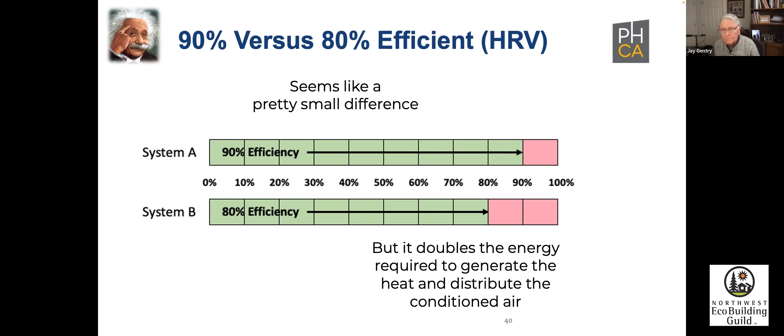So when you're thinking in terms of efficiency, look at the backside, if you will. Next thing: efficiency is the first renewable. I'm not going to read all of this, you'll have it so you can read it at your leisure.

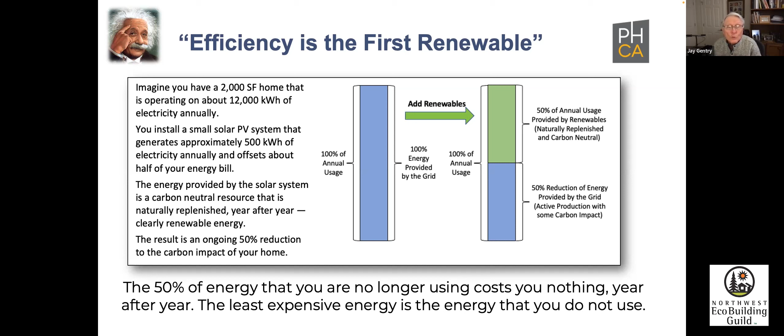Basically, if you take your annual usage of energy on the left-hand side, and you add renewables to reduce it by half, that 50% energy that you're no longer using costs you nothing year after year. The least expensive energy is the energy that you don't use. You can put renewables to do it, but you can also do it by employing efficiency measures, doing air sealing, adding insulation, using LEDs, all of those things, and you reduce that.

Another thing that I've found helpful is to put the investment in context. You're selling wood fiber insulation and it's more expensive than foam, and people say, God, it's 20% more expensive, that's really expensive. So I'd suggest you break down the investment categories in the build and retrofit. I haven't defined the categories here, but the insulation isn't a big portion of the overall cost of the home.

You can explain that the product category, whatever you choose, is only 5% of the project cost. So even though it's 20% more to get the wood fiber, it really only represents a 1% increase in the cost of the overall home. For that 1%, are you willing to give up efficiency, health, comfort, or resilience for such a tiny investment? That's another way to do something.

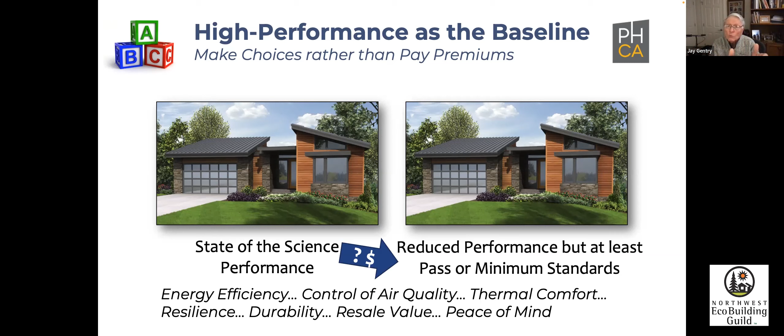You want to give up efficiency, air quality, comfort, resilience, durability, value, peace of mind. People love to win, but they hate to lose. So giving something up, positioning it as 'this is what we offer, we can save you some money, but you're going to give something up for it' is much more powerful than saying 'this is what code requires us to build, but we could do something better like this.'

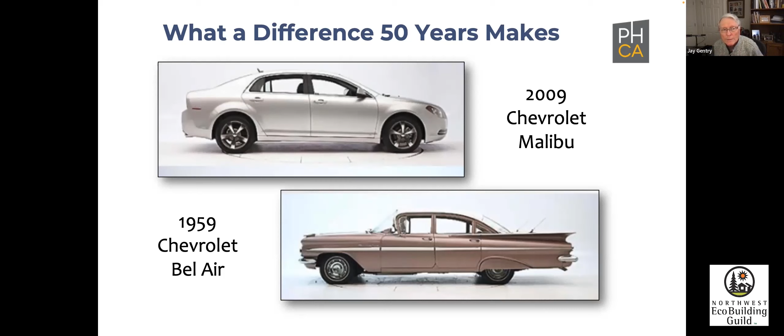The next one is: what a difference 50 years makes. You can find this video on YouTube. It's a 2009 Chevy Malibu in a head-on collision with a 1959 Chevrolet Bel Air. They used test dummies, of course, and the car built in '59 has a longer wheelbase and is significantly heavier. The 2009 car has airbags and safety belts and things like that. If you look at it, the driver in the 2009 car walks or maybe limps away, where in the other one, you need buckets to get the driver away.

The same thing goes for a Toyota, if you will. If the baseline model only complied with '59 safety regulations, you'd have to spend extra to get safety belts, airbags, anti-lock brakes, energy absorbing frame, air sealing. Would you invest to get them? Probably so, but you don't have to think that way because they're required to have them. The safety regulations put those there. This is the baseline, and if you want to add extra things for convenience, like an XM radio or video cameras, you can add those, but that's the baseline.

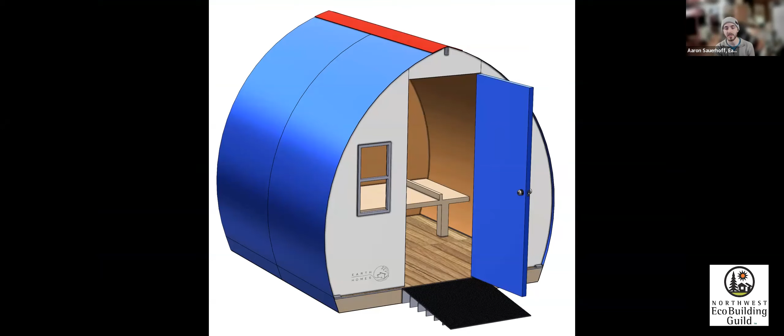So just as a little plug, this is our initial mock-up of where we're going in the next generation of micro shelters. We're talking hyper low-carbon sequestering materials, high performance, high efficiency, et cetera, very low cost. But more on that later.

So here are some really important goals. Actually, sorry, that's the next slide. This is a brief overview of what I'm going to be talking about.

Natural ICFs—ICF stands for insulated concrete forms—it's a way to... ICFs are great, there are ways to reduce the amount of EPS foam. If a client wants to use ICF, great. There are natural ways to do it that use 17% of the concrete as standard monolithic concrete walls, and that's what we used for the Briar build that you're about to see in a minute.

SIPs, fantastic - there are natural ways to do it. There's a company up in Canada we work with when we order SIPs. We call it SNIPs, structural natural insulated panels. These use recycled shredded glass - there are huge mountains of glass bottles unable to be recycled, so companies shred it up and use it for insulation. They use a structural wood fiber board as the shear and insulation wrap, airtight, pre-assembled, very large wall system panels. You'll see some pictures of that soon.

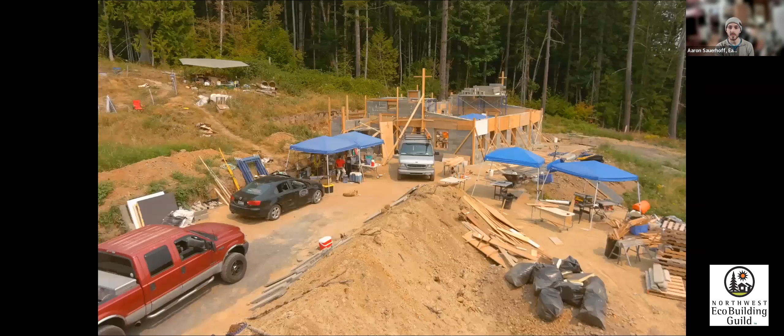Here's a short little raw drone footage of the early part of this process. This is the intro shot of this late summer briar build, as we call it. So it's an ICF house that we built into a hillside.

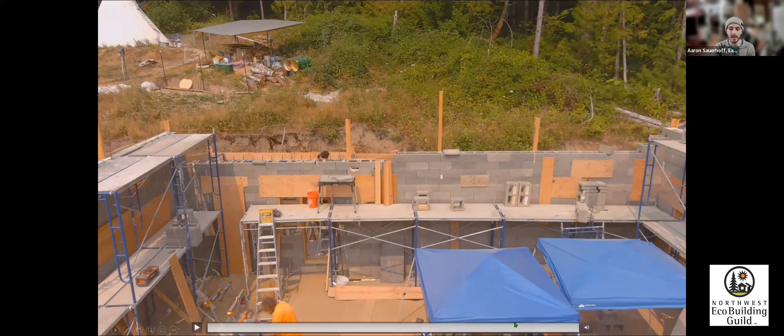So the whole back of that house is a retaining wall that got buried. What you see in the background there is them building a root cellar that got buried into the hill. This is kind of the cross section of the blocks you can see right there, with a little bit of form work at some spots where that could blow out.

So yeah, the system, the methodology is very similar to any ICF block, but it's far more healthy and natural and plasterable, which is really nice and easy to work with.

What I really appreciate about blocks and wall systems like this are how easy it is to crane on either SIPs or SNIPs. The attachments are easy, simple. It's a fully insulated, relatively low carbon wall, roof system that is quiet.

And incredibly airtight. Where it connects, we just did a whole thermal infrared scan of the building today and confirmed that where all the walls and roofs go together, there's no thermal bridging. We couldn't see the seams of the walls and the roofs in the infrared scan. So I'm really, really excited to say that it worked. We created a really high airtight building envelope with almost no thermal bridging.

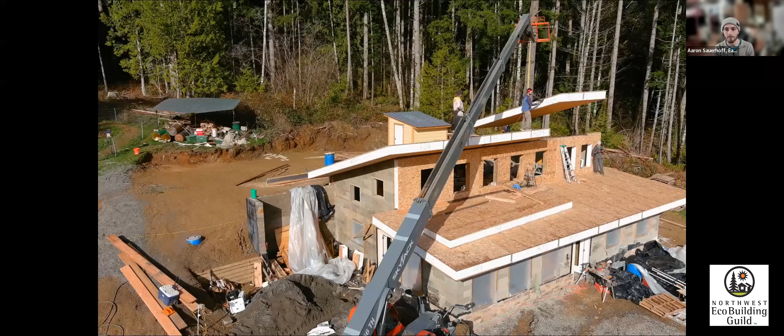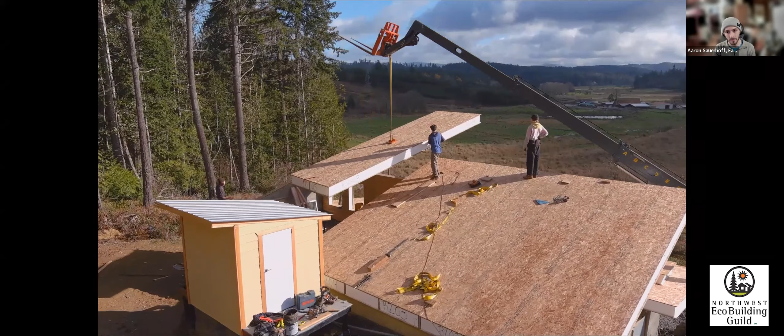Again, this is another quick little drone shot of how SIPs can easily be installed on blocks or other walls. I'm a huge fan of affordability, and when we can reduce the installation time and make the installation process more accessible, that is an important component to this model. So, again, beautiful view. Love this site.

Plasters. I want to talk for a moment about clay plaster and the importance of it. I won't go too deep into the details, but there's a relationship between clay and water that as clay is exchanging water actively with the air, it's releasing it about 50 times smaller of a water molecule. And that ionizes that water molecule pretty substantially. That electrostatically attracts itself to anything floating in the air, dust, bacteria, viruses, anything floating becomes then heavier and falls out of the air.

So every time we walk onto this job site and walk into this house, one of the first things that people notice and comment on is, well, after they comment how beautiful it is, they say the air is really clean. Feels really clean in here. It's true. Clay cleans the air.

Selling point. I'm proud to say that this house has no paint. It is a paint-free house, and it's beautiful.

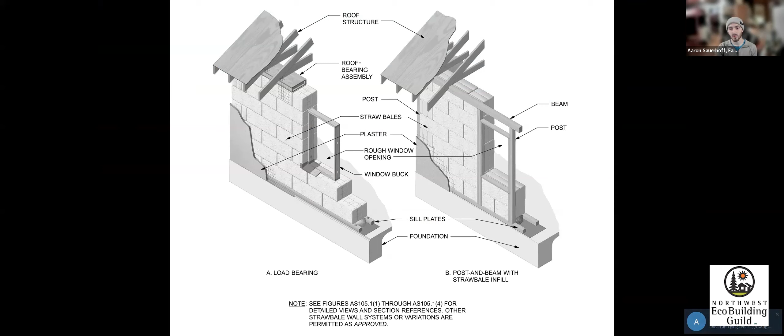I'm really excited about the work that CASBA, the California Straw Building Association, and many other organizations have been doing over the decades to bring building systems like straw bale, and soon cob, into the International Building Code. We now have Appendix S in the Building Code.

This is straight out of the code book. Bales can either be load bearing on the left or non-load bearing on the right, with either post and beam or a Larsen truss system.

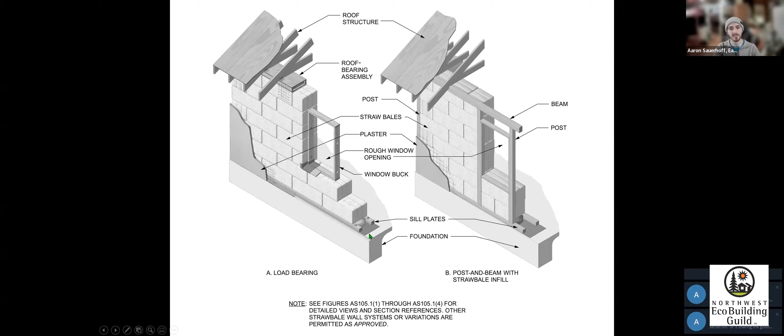I'm working on this in a program I use called Revit, and this is where it gets a little technical. If you're here, I hope you appreciate a little bit of technicality. Larsen trusses are a great way to reduce thermal bridging in a structure.

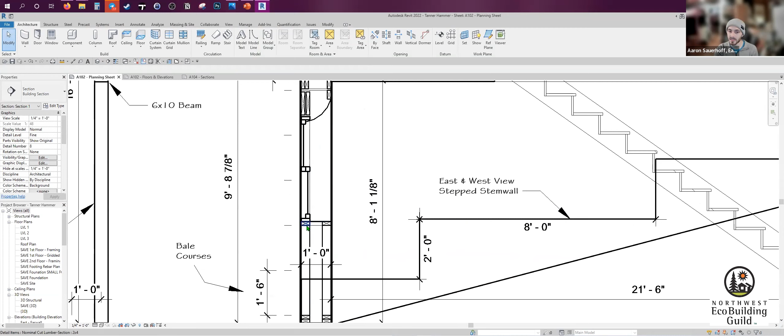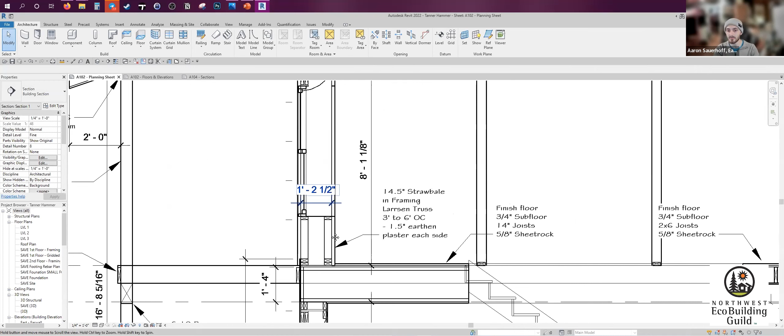We're still waiting on the engineer to confirm whether this can be 3-foot on center, or somewhere between 3-foot and 6-foot on center, for a double stud type wall system that puts the bales on edge. That's still an incredibly thick wall, the full bale on edge, creating a 14.5 inch wall cavity, plus 1.5 inches of plaster on each side.

On the outside, in the Pacific Northwest, you need a good hat and good boots. That means a good overhang, and that incorporates calculating where the sun passes — passive solar design. It's the Pacific Northwest, so it really takes advantage of the thermal gains from the sun and keeps the water off the walls.

We need a big overhang in the Pacific Northwest if we're going to use natural materials, because wall systems need to be breathable — vapor permeable, airtight wall systems that are highly insulative and incorporate thermal mass. I'm going to keep repeating those terms because they need to be ingrained in our minds when thinking about whether this wall system is a good idea in this climate. Those are the criteria we really need to start with, at least. We can't compromise on any of those, though there are others to incorporate.

Let's see what else about this. I want to start opening it up for questions as we go, because I want to talk more about the technicals, but I want to know what you're curious about, what you're noticing, what you want me to speak more to. I want to turn this into a conversation. I want to know where to go from here.

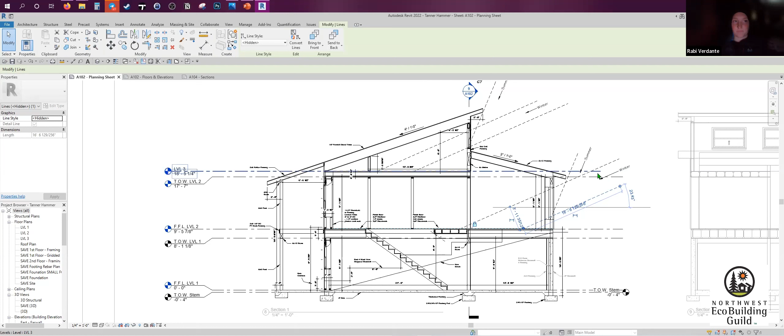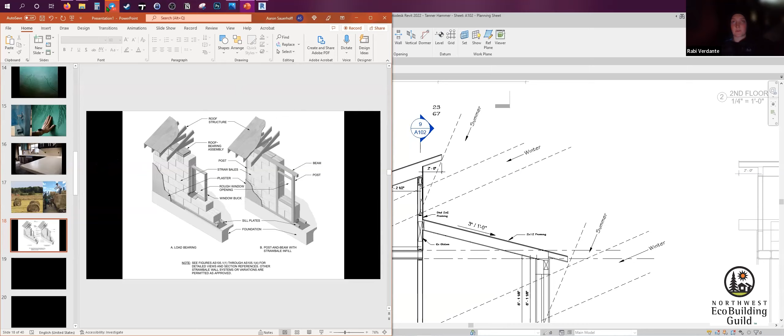Hi everyone, I'm Rabi, Aaron's right-hand person most of the time. Bamboo is a great resource for growing and building if you're in that climate, and if it's a naturally occurring plant there. The reason we don't promote it or want to proliferate it a lot is because it's actually quite invasive, and the root systems take over and tend to choke out natural flora that we're really trying to save and preserve here, especially as so many different species have been introduced — we're really trying to stay local.

This was also brought up in the chat, so I'd like to speak to it. Hemp is obviously a big buzzword these days, and Aaron mentioned a high biomass plant fiber that we work with. There's really one we prefer that we don't tend to share a lot about, but it's any bast fiber — a lot of them are grown in Southeast Asia, Africa, warmer climates — and given enough acreage and property, they could be grown quite well here if naturalized, which is some of what we're doing. Hemp has a history and is easy to grow, but it isn't quite as accessible as we'd like, and there are fibers that can produce more and tend to take less political and financial leveraging. So that's a lot of where we're coming from with the plant world.